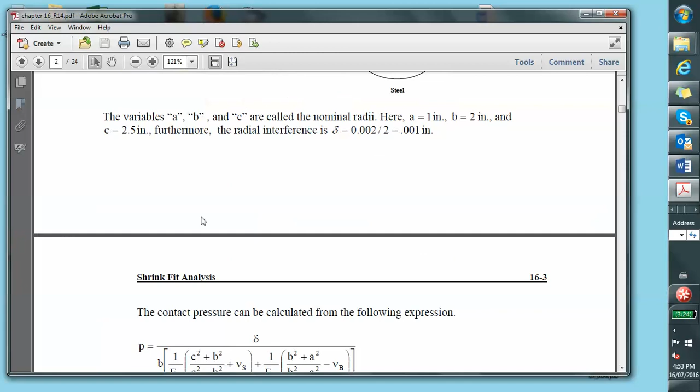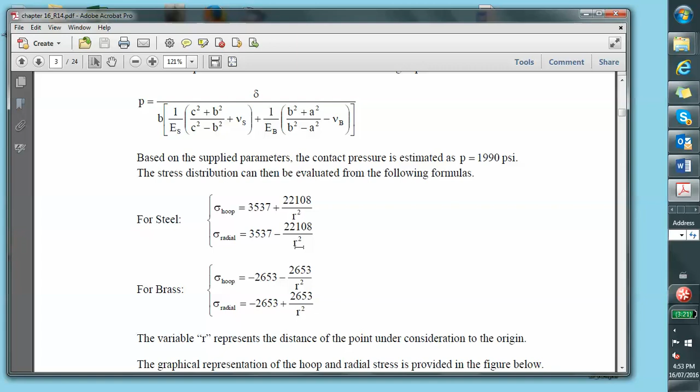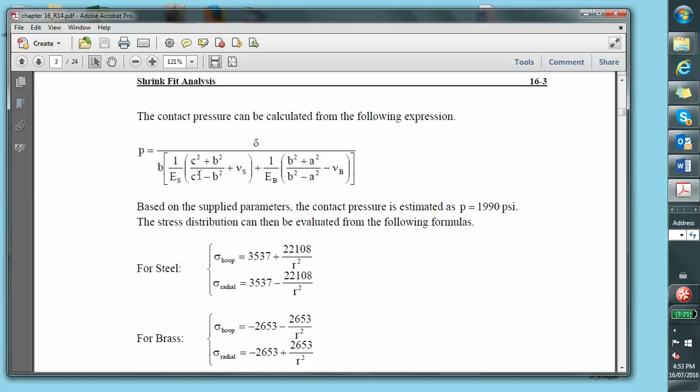One can actually get an analytical expression for the hoop stress in the bronze. I see that here I'm referring to it as brass, so this should be bronze, and the steel, and they're given by these expressions, both the hoop stress and the radial stress. I'll mention the axial stress in a minute, and then based on the material properties provided, namely Poisson ratio nu, Young's modulus E, and the dimensions of these rings, and the numerator, which is the radial interference, one can find the contact pressure.

Now, one thing you should realize, if you plot these two, you'll see that there is a discontinuity in the hoop stress, and it's always the case that when you have material discontinuity, in other words, two different materials interacting with each other, at the interface we do have a jump discontinuity, and that's obviously showing up here. Now, the radial stress, on the other hand, is continuous, as you can see that it's a dotted one.

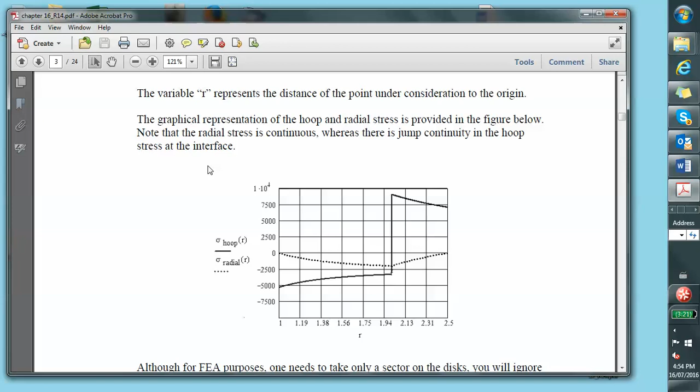The other thing I should point out to you, as far as this problem is concerned, if these rings were actually of given heights, then the problem can be thought of as a plane stress problem. In other words, there is no stress developed in the vertical direction. Or let's put it this way: the stresses developed in the vertical direction are very small because there's nothing that confines this thing from moving in the vertical direction.

On the other hand, if you view these things as very long rings, then basically we are pressure fitting a long tube inside of another long tube. In that situation, you're dealing with a plane strain problem. In other words, there are actually stresses developed in that length direction. Now, for me, I'm assuming that this is a plane stress problem. In other words, there is no stress in the height direction, and therefore this is a ring pressure fitted inside of another ring.

The other thing is that this problem is done in the book, but no planes of symmetry are taken. In other words, it's okay if you do it that way. However, if the problem is given to you on the test, you will be asked to use any applicable planes of symmetry, and in this case you can see what the planes of symmetry are. First of all, there's an infinite number of planes of symmetry. One of them is definitely halfway between the top face and the bottom face. That's obvious.

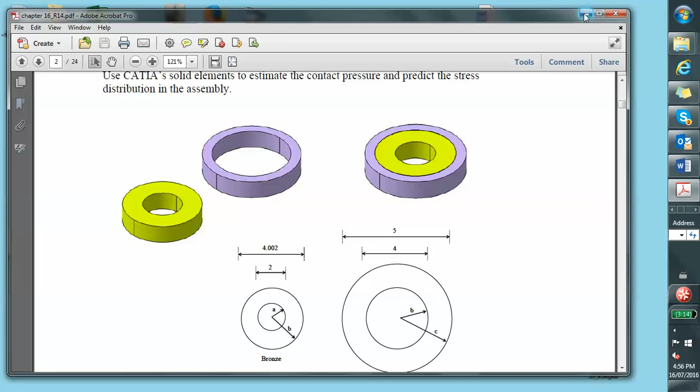Okay, so I will take a segment, but if you're interested in how to do it as a full structure, which is actually harder because you may have issues with restraining the object from rigid body motion in the vertical direction, you can look at the book. All right, so I will use the same dimensions that are in the book. So let's go to Catia and create the part, or the assembly actually.

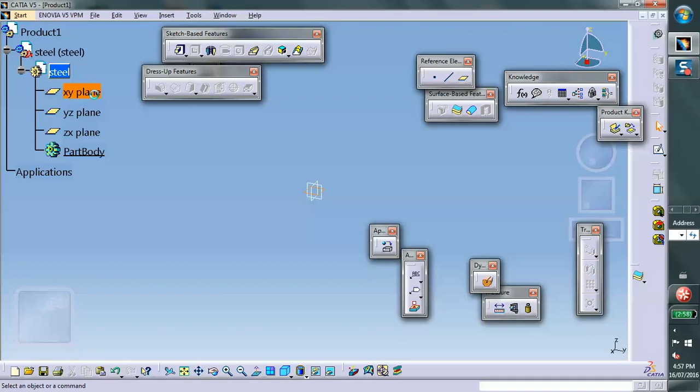So let's see now. Insert, new part, in there, and let's call this thing. Let's do the outside one first. So let's rename this thing to be steel and steel. Say OK. Let's make the steel. On the XY plane, which is just for convenience, I will draw a sector of that structure. So this is going to be my, well actually let's do a sector like that. And I'm going to put a dimension here, so that is exactly what we want.

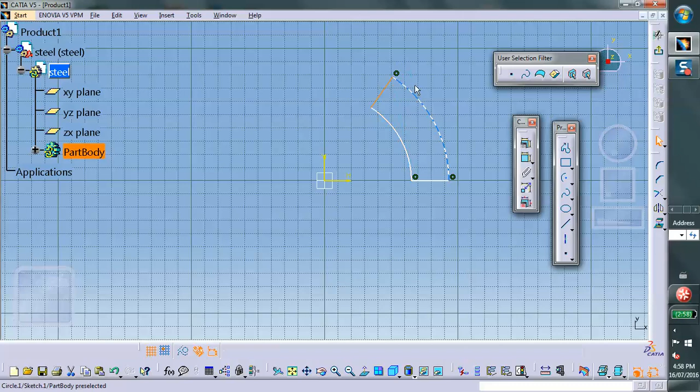Okay, so let's see, a line from here to there, and a line from here to here. Let's give these things some dimension. This outside one and this inside one. The inside one, according to the book, is 2 inches. And the outside one is 2.5 inches. These are the radii, 2.5 inches.

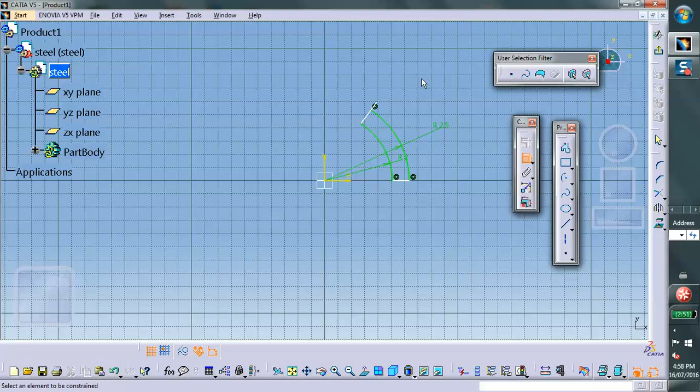Okay, the only thing is that I have to close this thing. So what we can do is this point, control that point, and you make it. Actually, let's start this point. Control this point, and we make it coincident. Or you could have trimmed it, by the way.

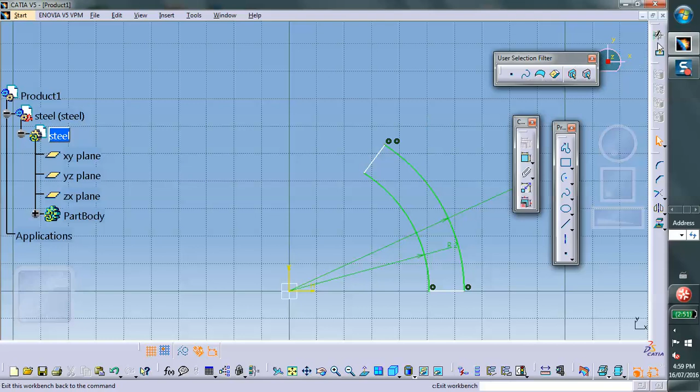Okay, good. Now I'm going to exit this thing, and I'm going to pad it by half the height that's specified in the problem. Let's see, I'm looking at the book to see if the height is given there. I think it is given. The height is, let's see. I'm not sure whether the height is specified in the book or not. It probably is, but I don't have the time to go and find out what it is.

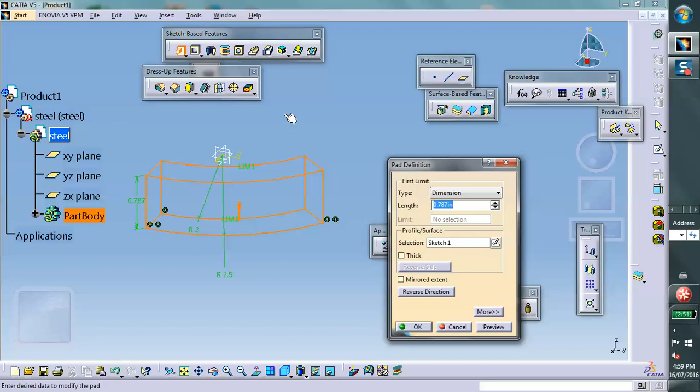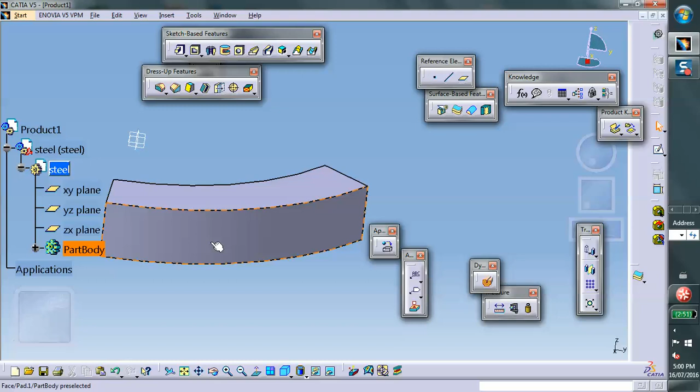So let's hypothetically say the height is 3 inches. Okay, then I'm gonna pad this thing by 1.5. Instead of using the saw and cutting it and things like that, we're going to actually, you know what, let's make this thing 0.5. Okay, so in the actual ring, the height is 1 inch. Because we are taking planar symmetry, I'm taking half the height, which is 0.5.

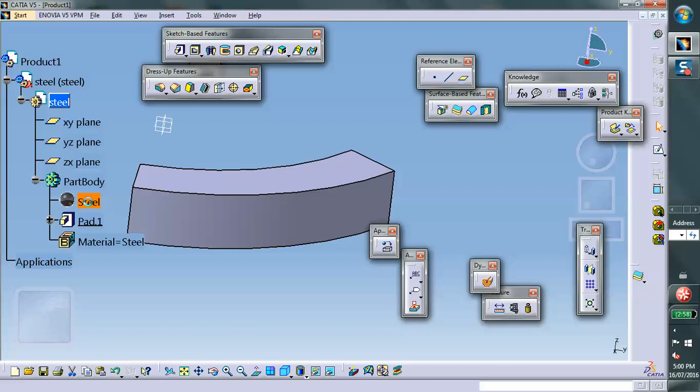Okay, good. So this is made out of steel. We might as well apply the material property on it. So it's going to be metal, steel. And by the way, I'm not going to change the values, but if you want, you can always go change the values by double clicking on this steel property, you select the analysis, and you can put any numbers that you want for Young's modulus, Poisson ratio, etc. But I don't want to do that.

Incidentally, while we're here, let me change the color of this. So right click, properties, graphics, and I'm going to change this thing to say yellowish. Okay, good. So look, don't forget to save. We do a file, save management, save as. Okay, on the desktop, we create a new folder. We give it a name, shrink fit, and say OK, and save everything.

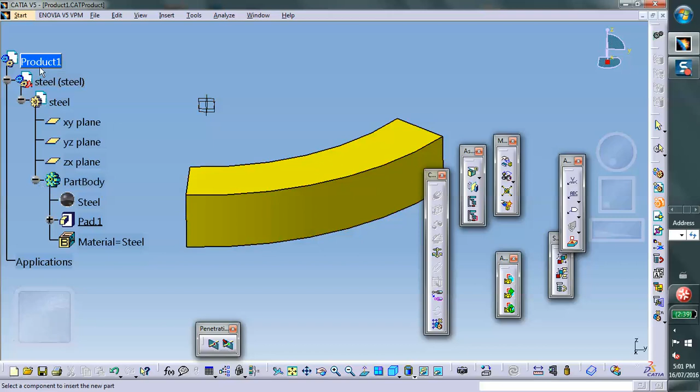Good. Now we insert the second part. So insert a new part in there. Say no, and I'm going to change this thing to bronze. So we're going to change the name of the part and the instance name to bronze. And bronze. Okay, let's make it. Double click on a convenient plane, the XY plane.

I will sketch. Now, in the book, when I made the part, I made it exactly with the bigger dimension. In other words, I made the radius of the outside circle of the bronze to be 2.001, because that's exactly the way we actually want this part to be. However, what I'm telling you is that in order to do this analysis, it is not necessary to make the parts of different sizes. I can still make the outer radius of the bronze to be 2 inches, not 2.001 inches.

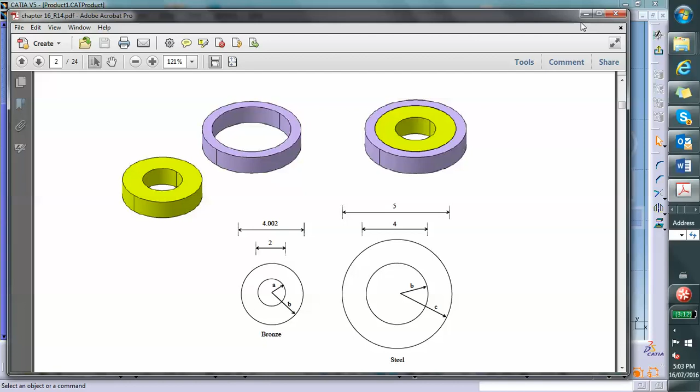However, later on, when Catia asks me what is the radial interference for shrink fitting these parts, I will say that the interference is 0.001. In the book, the outer radius is made to be 2.001. What I'm going to make is 2.0, okay? And it will not change the analysis. Obviously there are some differences, but it's perfectly acceptable either way.

So let's go here and create what we want. I'm going to project this because the radius is the same, 2.0. This is what I decided to do. And then I'm going to make the other one. The inside radius of that thing was, what was it? If you look at the paper, the inside radius of the inner hole is 1. Okay. So first of all, let's clean this up.

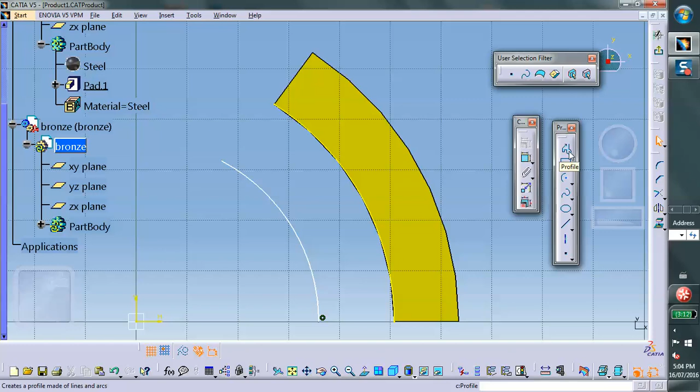Let's see. From here, let's hide this guy. Okay, from here to here, and then from here to here. I'm gonna have to do a little bit of a cleanup here, so I'm gonna do a quick trim. So this is gonna go. All right, let's wait. This is thinking. Okay, this is gonna go. Oh wait, it'll work.

This is why it's so important to save things in case, you know, this happens. Good, it did work. And then this one, and this radius, obviously that radius is already 2. I know that because it was projected from the steel part. And this radius, I want to make it a 1. Good. Now we exit this thing, and we pad it by half an inch, just like the steel part.

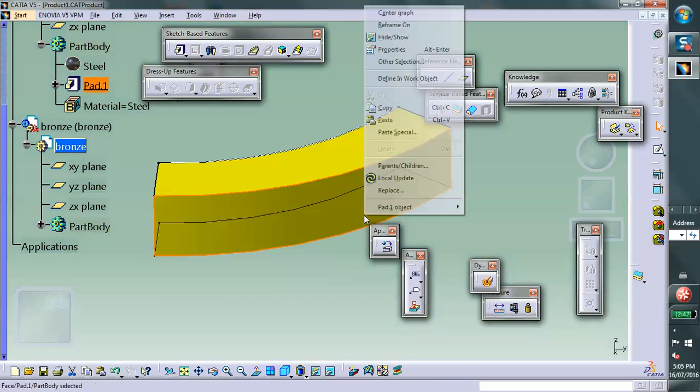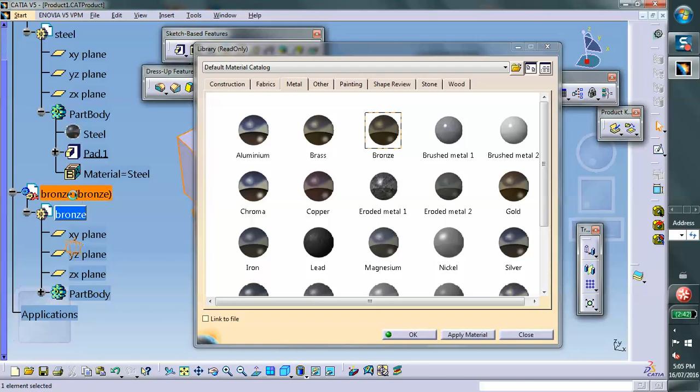So you can see that we pad this. Where's the pad? Pad this by 0.5. There. Okay, we make this thing out of bronze. So apply material bronze on this part, and we say okay. Save everything. Let's actually save the whole product because I'm doing it the lazy way.

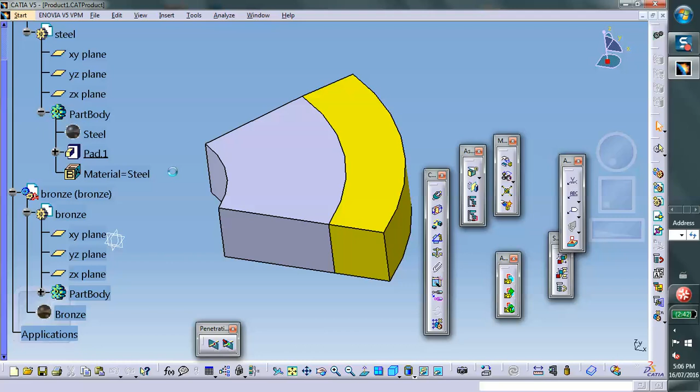Good. Now we're going to move to analysis and simulation, generative structural analysis. Okay. Well, you can see that the 2 parts have been meshed because we're dealing with an assembly here. CATIA, as soon as it sees a solid object, it's going to mesh it. And if you want to see the mesh, right click, mesh visualization. There it is.

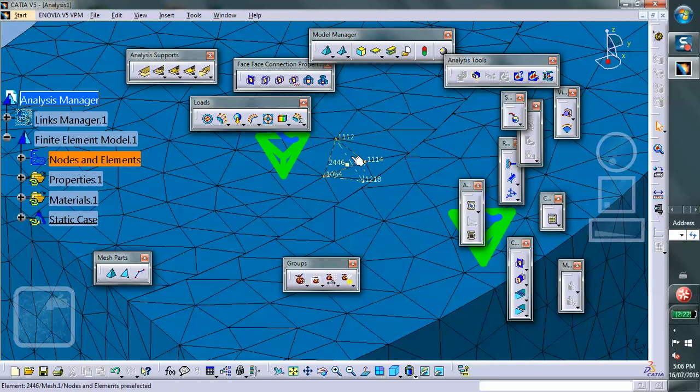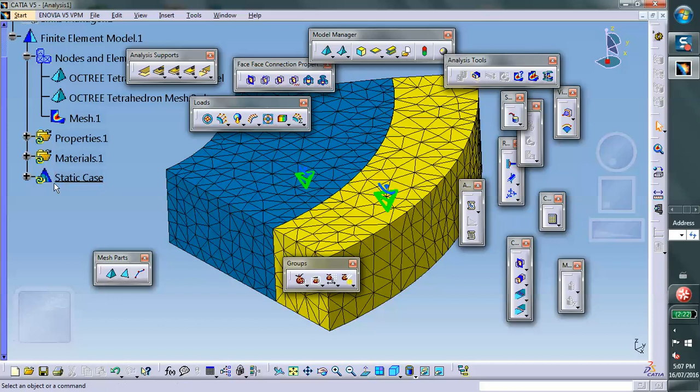And notice that there is an interface here. As a matter of fact, to convince you, I can change the color of, say, the steel elements. So properties, I'm going to change it to a different color. Instead of this, maybe yellow. And at the interface, you can see that the nodes do not line up. Okay, good. By the way, it is possible to make sure that they do line up, but it's irrelevant to our problem. Deactivate the mesh here.

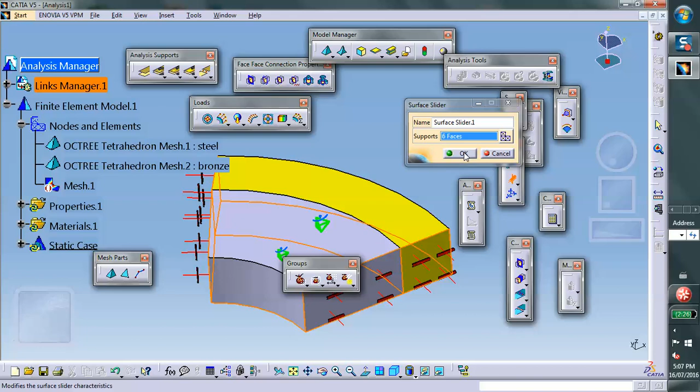Now, some of these are planes of symmetry. So surface slider on this face, and on that face, and the bottom, and this bottom, and this side, and that side. These are all planes of symmetry. The top is not a plane of symmetry because this ring was 1 inch thick. I took half of it, therefore the top is free. All right, good.

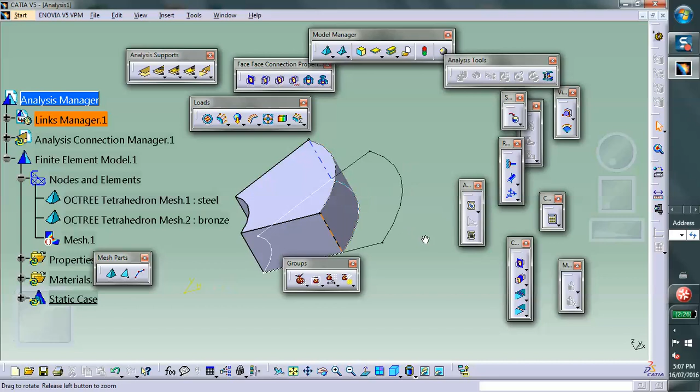Now we have to create a connection. So connection, I hide this thing, between this face as the first component, and for the second component, this corresponding face of the bronze part. Say okay. Let's bring it in the front, and you can see a connection has been created right there. I see this black dot. When I put the cursor on that black dot in the tree, the connection lights up.

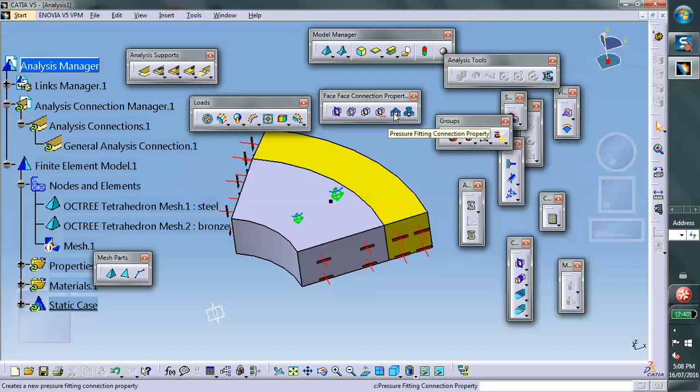What we want to say now is that this is a pressure fit or a shrink fit connection. So look at your face to face connection. You have used the second one, which is contact. You have used the third one, which is fasten. Hop over 2 more. Second one from the right, it says pressure fitting connection property. So you click on it, it says, where is your support? Well, obviously the support is this connection that I created.

Notice that it puts this thing that looks like something being squeezed inside of something else. And there is the radial interference that you have to put in there. Remember, this has the radial interference of 0.001 inch, and there it is. The only reason it knows what the value is, I didn't type it in, is because when I did the problem, yesterday or last week, I put up the correct value, 0.001.

Now, notice that the way I made the parts, there was no interference in the parts that I made. But still I do this. Even in the book, when I create the part which is a little bit bigger, by this much bigger, I still do the same thing. So we say okay, and hopefully we did not forget anything. We're going to run it. Let me run this thing.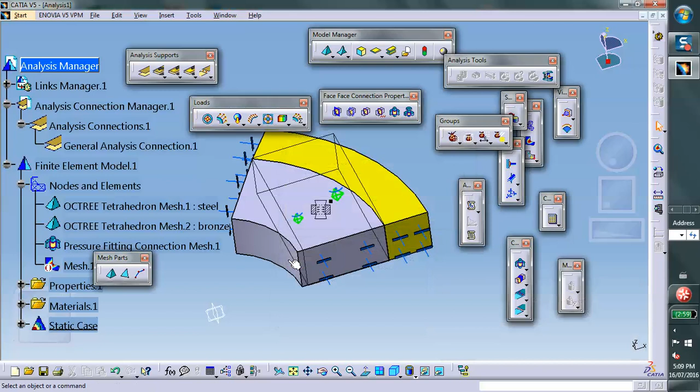It's complaining about the mesh. We know that at the interface you need a finer mesh. It's complaining that your mesh is probably not good enough and things like that. So let's look at the stress distribution. There is something I see here that I don't like, but anyway, we'll see that. First of all, let's look at the different rendering. There it is.

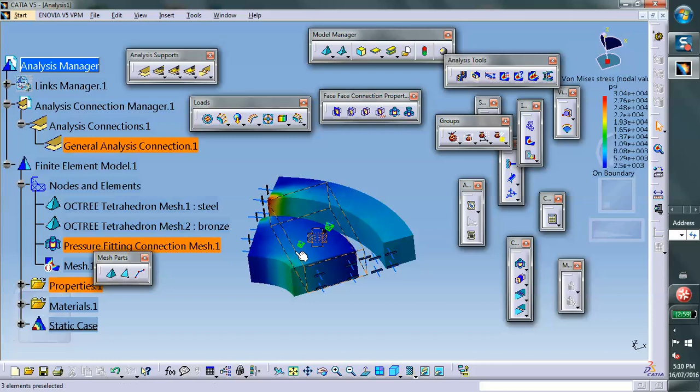And I certainly do not like what I see here. We may have to go and fix this thing, because I see that here we have a big component of stress showing up, and that's unrealistic. And as a matter of fact, what I also see is that this is not symmetric. It's supposed to be symmetric, unless my eyes are playing a trick on me. Since I'm running out of time, I'm going to stop this video clip, and go back to it and try to fix it. This definitely is not right. Okay, so let me stop this.